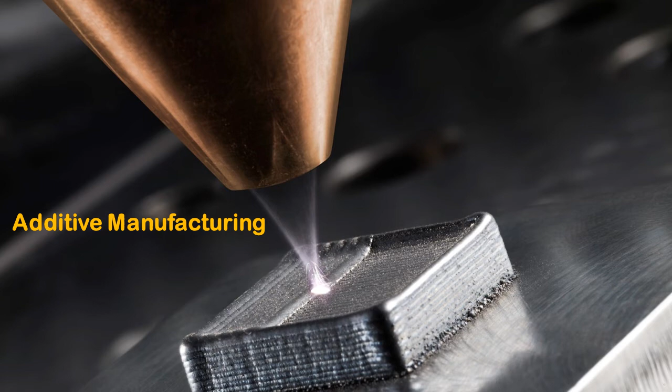Additive manufacturing. Is it the future? First of all, it is important to understand the concept of additive manufacturing. According to the American Society for Testing and Materials, additive manufacturing is the industrial term which describes all the technologies used to build 3D printed objects by adding layer upon layer of material until reaching the desired shape.

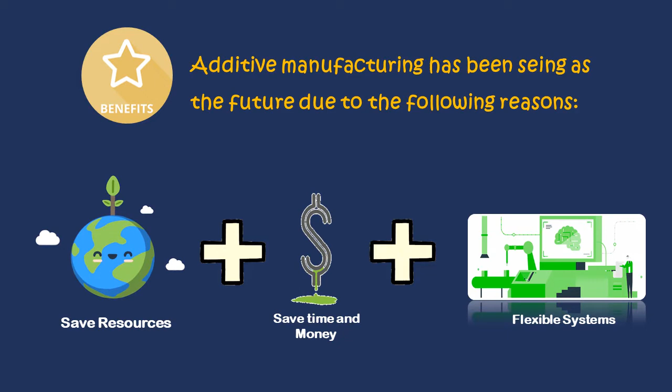However, why is additive manufacturing important? The reason is related to the fact that it is obligatory to adopt innovative technologies capable of reversing many of the problems caused by the manufacturing industries and processes. More than ever, it is essential to implement environmentally friendly, efficient and multifunctional technologies. Due to this new scenario, industry and researchers have developed new additive manufacturing technologies to substitute the conventional processes which, inevitably, have led to the rising of ambitious projects.

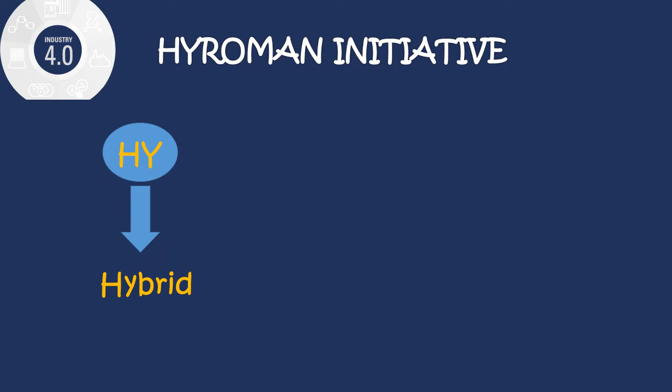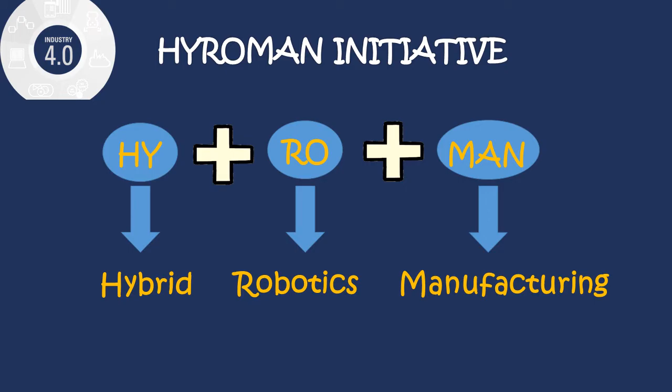One example of the last statement is the pioneering initiative called HYROMAN, which is integrated into Industry 4.0. The aim of this initiative is creating a hybrid working cell that combines additive, subtractive and transformative processes, fully executed by robot manipulators, in order to allow the manufacture of any kind of objects. Therefore, this new concept of production is expected to produce a significant impact on industrial variables through an estimated decrease of 20% in the production time, 25% in the production costs, and 50% in the resources costs.

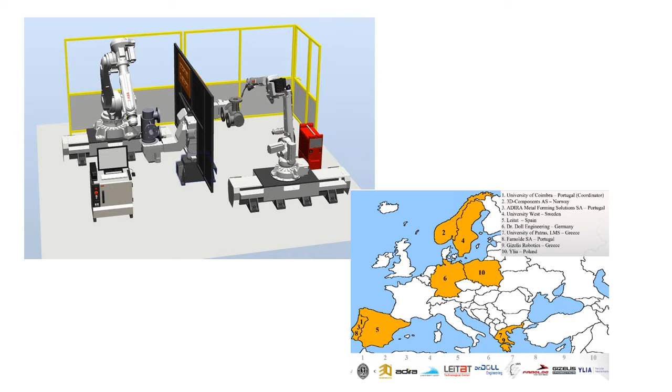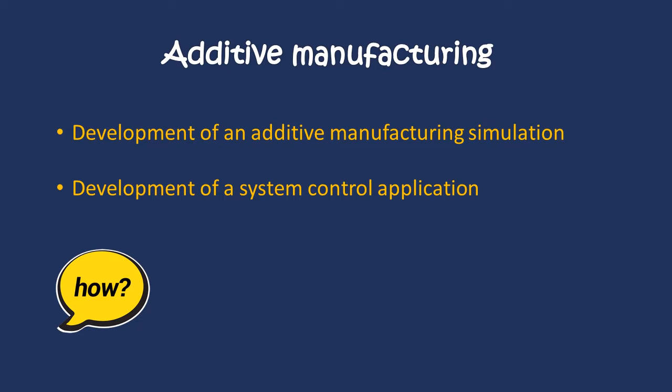In the last years, this initiative has inspired a lot of research, such as the latest one from the University of Coimbra, whose objective was the development of an additive manufacturing simulation controlled by a system control application. However, how is this done? Well, the answer is simple. The development of the additive manufacturing simulation was done by merging the industrial robot software, RoboDK, with the open source software Slic3r, while on the other hand, the system control application was fully developed in Python.

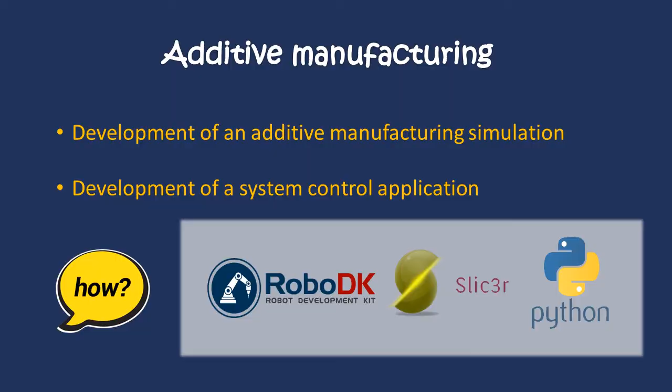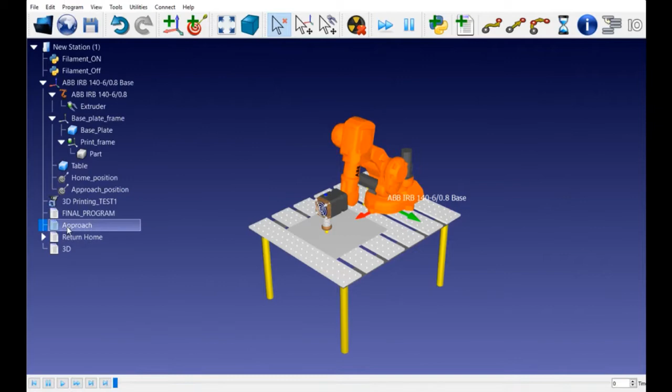As previously mentioned, RoboDK is an industrial robot software that allows offline and online robot programming. The robot offline programming was an essential feature since it allowed the creation of a virtual simulation, which is responsible for emulating the real working cell, as well as all the additive manufacturing tasks. In terms of design, the working cell was projected to be simple, flexible and efficient, being only composed of a robot manipulator, an extruder and a bedplate.

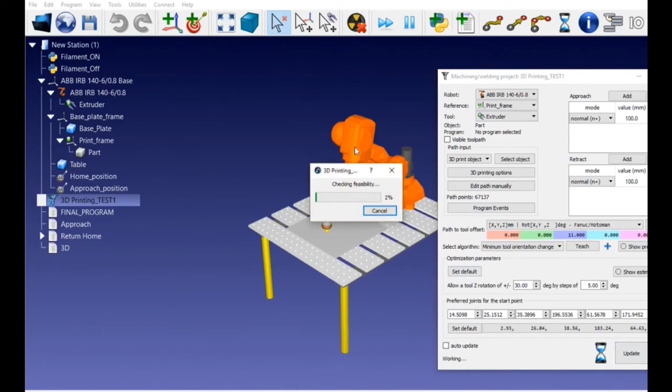However, to perform an additive manufacturing simulation, it was necessary to generate robot programs capable of executing all the additive tasks. By merging RoboDK and Slic3r, it was possible to generate a robot program that contains all the necessary information to generate a virtual simulation. In addition, it is important to note that all the programs generated can be later executed in a real robot station and followed through a virtual simulation.

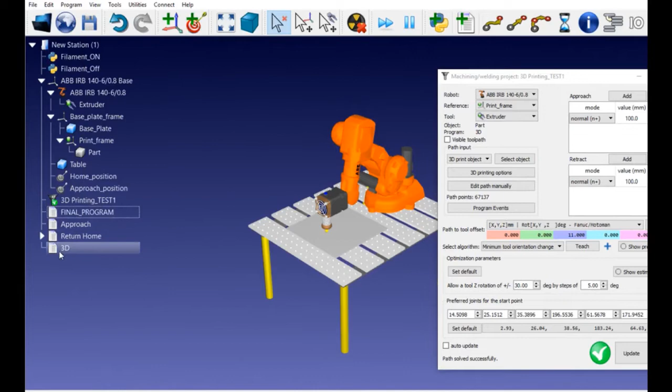However, the simulation would not have any practical interest if it was impossible to interact with it. This is justified by the following arguments. One of the main goals of the Hyroman initiative is creating a standard working cell that can be used to produce any kind of objects, under some size limits. This means that it is necessary to interact with RoboDK's working station to generate the printing program, according to the new object to be produced.

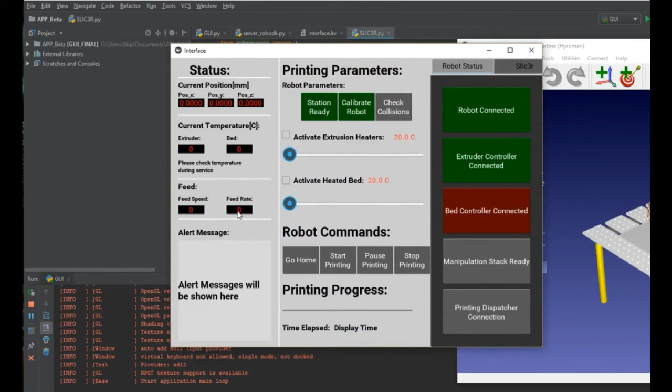Another important point is the fact that additive manufacturing technologies do not usually have static parameters since they need to be adjusted under simulation, whereby a complete monitoring of all parameters is also essential. Finally, for security reasons, the additive manufacturing tasks must be launched as part of the RoboDK environment in order to prevent errors. Therefore, the interaction with the simulation is ensured by using a system control application. This system is an app, fully developed in Python, that allows a user to control and monitor the entire simulation.

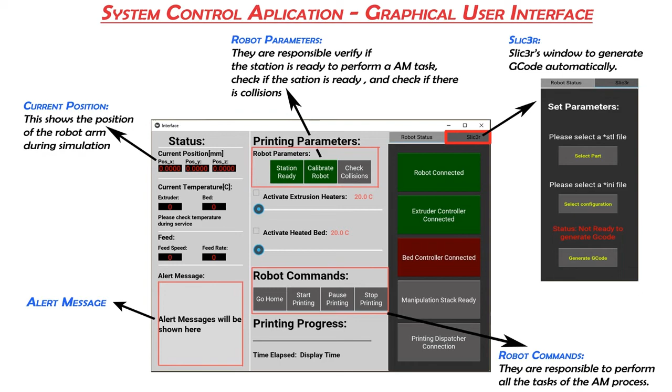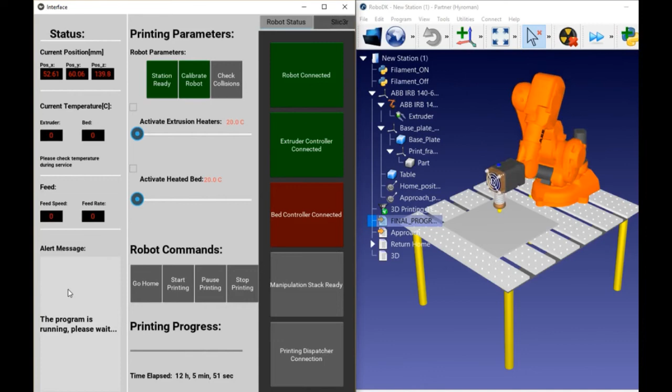As mentioned before, Hyroman is an industrial initiative, so the system control application needed to be built with special care in order to make it usable by any user. This was done by designing a user-friendly interface that performs all the controls by simple commands, such as clicking a button or dragging a bar. As an extra feature, the system control application has the slicer fully embedded to make it able to generate G-code automatically by simple commands. This feature also gives the user important information about all the parameters used to slice the part, as well as part-specific information.

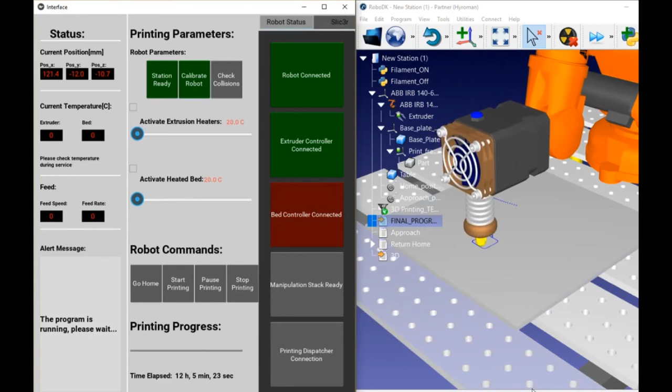The final result was a system control application that is able to control and monitor an additive manufacturing simulation, as can be seen. To finish this presentation, it is important to keep in mind that this is not a final product. However, this is definitely a huge step to progress the Hyroman initiative. Additive manufacturing technologies will certainly be the future.